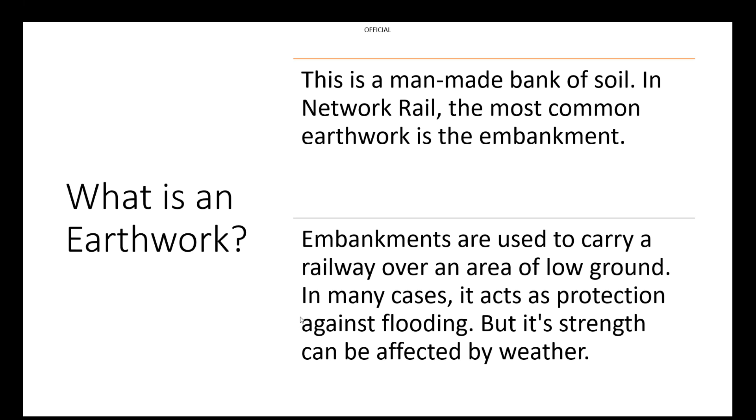So firstly, what is an earthwork? An earthwork is actually just a man-made bank of soil, and in Network Rail the most commonly used earthwork is an embankment, used to support the railway. Outside of the transportation sector, embankments can also be used as flood defences, especially near rivers and towns. But the strength and durability of an embankment can be affected by weather.

Weather can heavily influence the railway, especially one of the most common types of weather in the UK, the rain. This is very evident due to climate change, and is a major issue that the railway needs to adapt to. Rain can affect the strength of the cutting, which can then cause debris to fall onto the track. When debris is on a track, it can lead to severe delays, which damages the reputation of public transport and also the reputation of Network Rail as a whole.

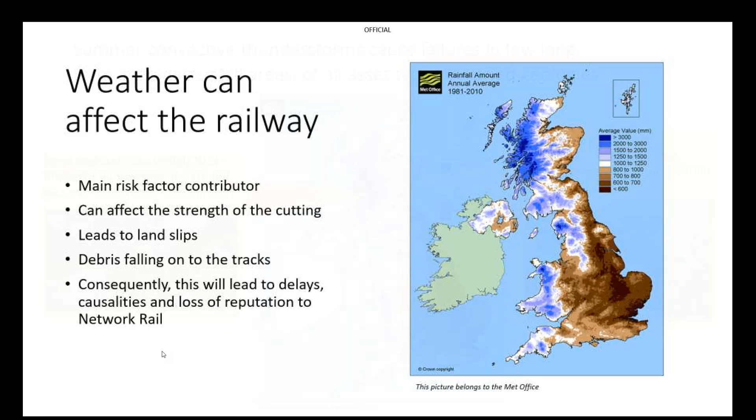As you can see, due to heavy rain, various earthworks have been affected. For example, on the West Highland Line in Scotland, 81 millimeters of rain fell within 4 hours, and this caused an embankment to fail. Then in Stonehaven, a rock cutting failed after 52 millimeters of rain fell in 3 hours.

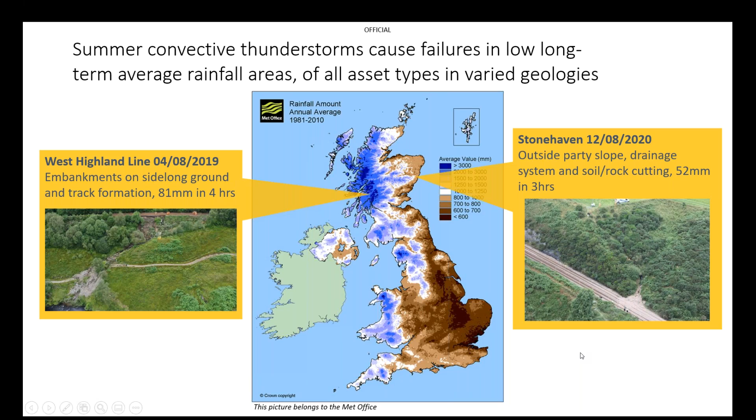Then when we head into England, there was also very heavy rainfall within 1 hour at Whitmore. And when we travel towards Watford, 50 millimeters of rain fell within 4 hours, causing the tunnel portal cutting made out of chalk to fail. This shows us that regardless of the soil type, water is an important issue. The main similarity in all these examples is that they happened in dry areas, meaning rainfall is typically low in those regions. So these failures were very surprising.

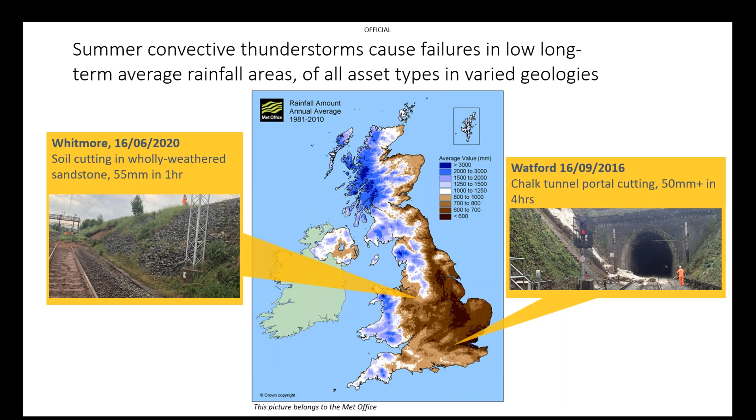So now you're probably thinking, what is Network Rail doing about this? We're learning from our mistakes, as these failures definitely could have been avoided by having a warning system. This has been pushed, and it's now started the development of the Convective Alerting Tool, or CAT for short. It keeps track of the rainfall in the area and sends out a threshold message to the engineers about what could happen, whether a mudslide or debris possibly landing onto the train tracks. By using CAT, Network Rail can further understand the risk levels of an area.

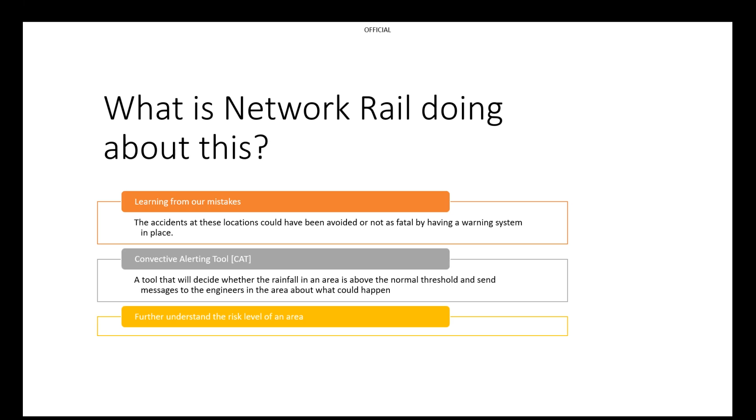So why is the risk level so important? At Network Rail, safety is our main priority. Our main goal is to ensure everybody, including you and me, gets home and gets to work as safely as possible every single day. So by knowing the risk level in a certain area, it helps us achieve that goal quickly and efficiently.

This leads us into the Operational Route Service, also known as the ORS for short. This combines 3 aspects to create an overall risk: rainfall, recorded every 3 hours and 24 hours, asset vulnerability, and network criticality.

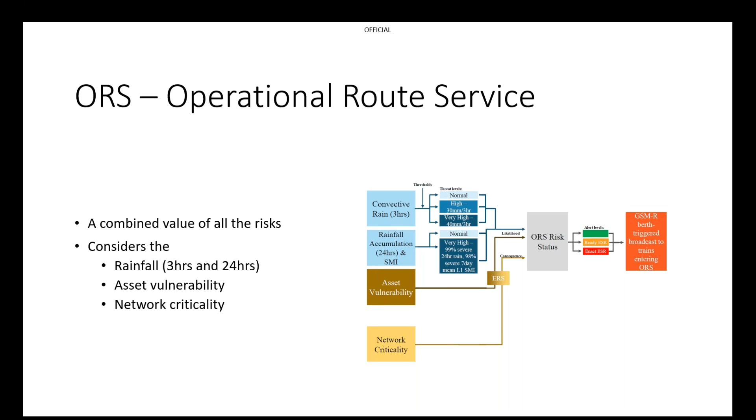To make sure that the ORS risk level is as accurate as possible, we need to make sure that for each of the aspects, they are recorded to a high level.

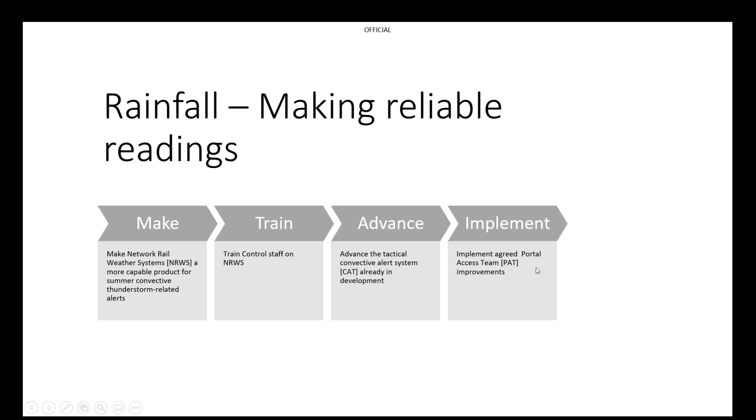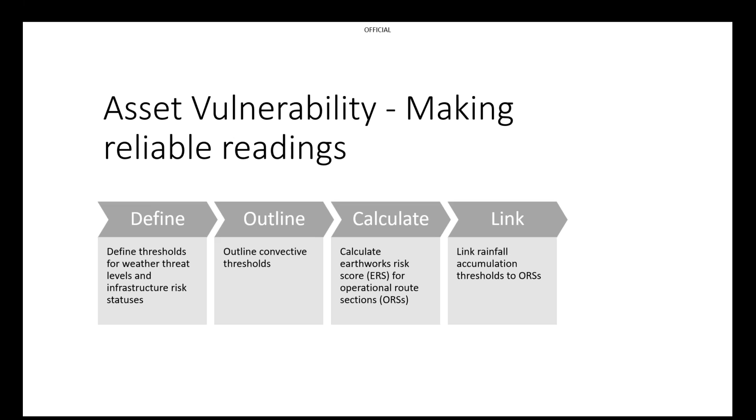Now for asset vulnerability, to make it as accurate as possible, it is all to do with setting boundaries. So this means that we need to define what threat levels are necessary for the weather and also for infrastructure risks. Then when we've defined those thresholds, we outline them, and then we calculate an earthworks risk score for the route sections, and then link that to the said thresholds for an operational route section. Next slide, please.

So now we know how the ORS works. You're probably wondering, what does it do? Well, it identifies which lines have high to low risk ratings. By knowing the risk, resources can be allocated efficiently in those areas to solve the risk, as well as reduce the risk level, therefore changing, say, a high risk zone into a medium or even a low risk zone.

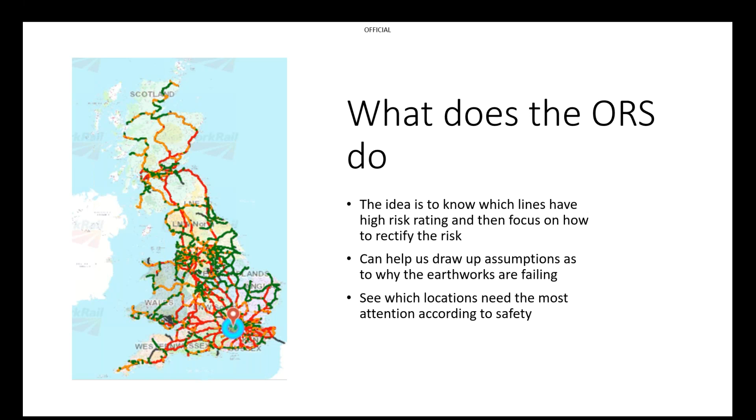So during my business familiarization placement, I joined the final stages of this project, and my task was to create a spreadsheet which highlighted the risk levels of common travel routes. I did this by highlighting various stations and also using the signal locations to find accurate starting and finishing points. The diagram that you see on your screens right now is an example of the data I would have to use.

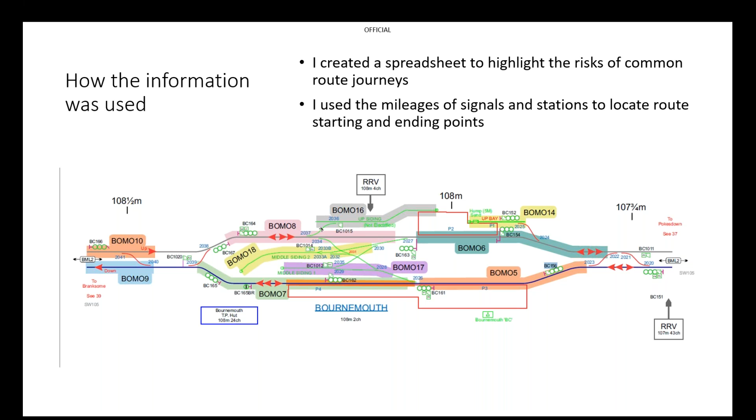So if I was looking at a route that traveled through Bournemouth, I would have to use the Bournemouth measurement, which is 108 miles and 2 chains, and state whether that would be the start point or an end point of certain journeys. Next slide, please.

I then got to use my own judgment to state the risk levels of certain travel routes. This task was done for the Wessex region, the Sussex region, and the Kent region, which happens to be highlighted as the turquoise area on the map of Britain that you can see.

I also got to make a manual to show others how to complete this for all the other regions that Network Rail operates in, as the end goal is to have an ORS spreadsheet for all Network Rail routes and regions. This way it will be easier for track engineers and also civil and building engineers to see where we need to spend most of our resources to make sure that our lines are safe. Next slide, please.

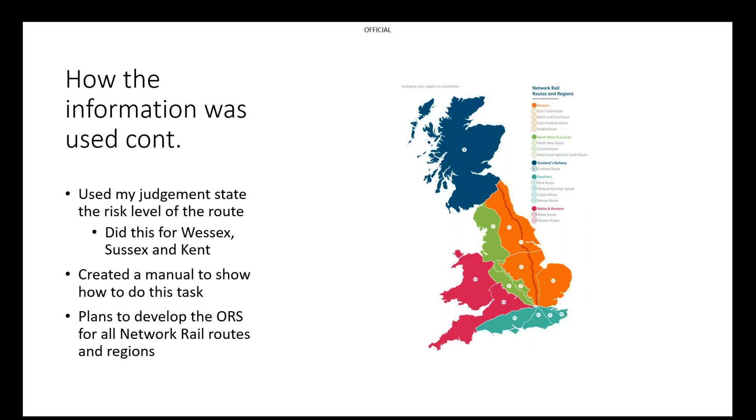So you're probably wondering what are the main benefits to using ORS? Well, there are multiple benefits, and here are a few of them.

We get to locate areas within regions that are prone to failure. We can spend and focus resources in that area to reduce those risks, as well as plan for failures that could happen soon. We can also notify councils about the risk levels of a nearby line, as well as help plan for reduced services and delays, which will be very beneficial as we can tell travellers about which trains might not be running, as that is one of the common issues we face if you ever travel - you go to the train station and find out that your train is cancelled. These notifications can also help with company reputation.

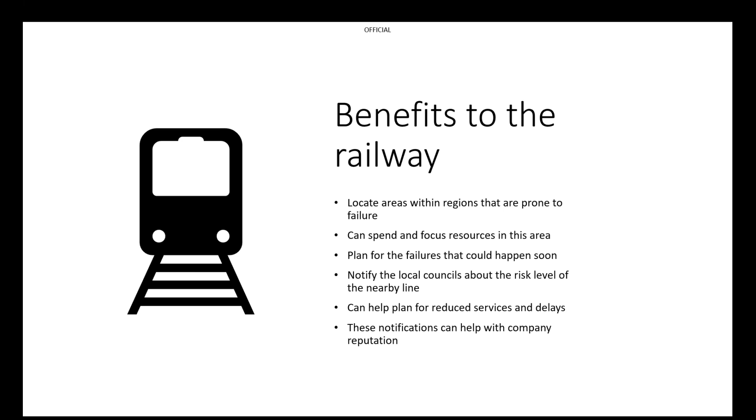Next slide, please. So you're probably wondering what the biggest benefit is. The biggest benefit is that it's giving Network Rail a chance to learn from our mistakes, as well as ensuring us as a company, and others around the world, can learn from our mistakes and make sure they're not replicated again in the future.

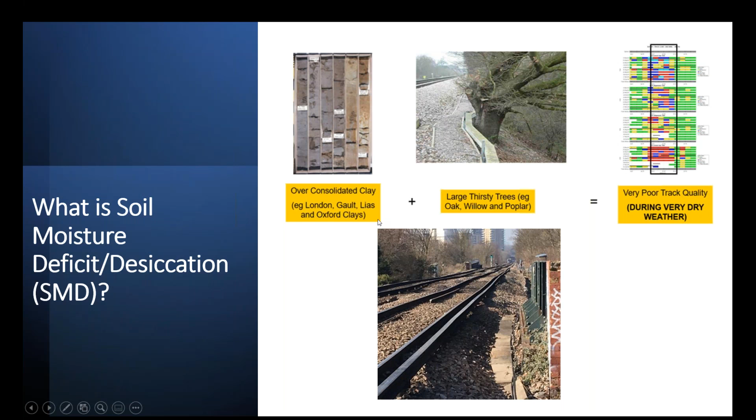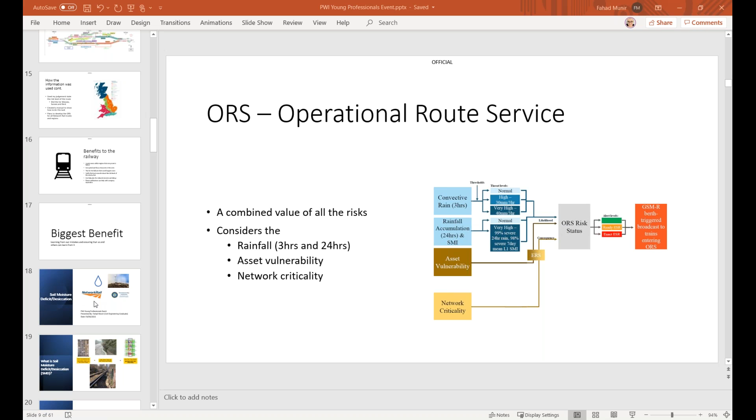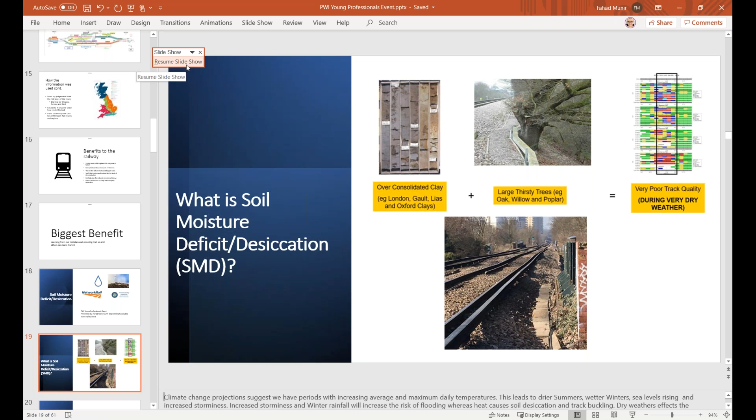Can I just stop right there? Lynn, I can't actually see my notes on my presentation. Sorry, yeah, that's because - are you only on one screen now, or are you on both? I'm on one screen, yes. We might need to try that two-screen format, otherwise you're not going to be able to see them. I'm really sorry, sorry guys, just bear with us a minute. Yes, now I can see my... Yeah, so we're only seeing your slide bank. Can you see your notes on your other screen? No, I'm just putting it up now. Can you see my presentation? Oh, we can - can you just share it? Can you do resume slideshow on that little dropdown, just so we can see the entire slide, or will you not see your notes if that happens? The thing is, I don't know if I'm going to see my notes. I can maybe do that if that's better. Yeah, if that works for you, that's absolutely fine for us. Fahad, no problem, all right. Sorry about that, it just kind of put me off. Didn't mean to catch you out like that, everybody. I'm really sorry about that.

No problem, crack on. So climate change projections suggest that we have periods with increasing average and maximum daily temperatures. This leads to drier summers, wetter winters, sea levels rising, and increased storminess. Increased storminess and winter rainfall will increase the risk of flooding, whereas heat causes soil desiccation and track buckling.

Dry weather affects the settlement of clay embankments. This is caused by shrinkage of clay as the moisture is drawn from the clay. The moisture is further reduced if large thirsty trees are present. This process is where wet soils dry and soil moisture content decreases as moisture evaporates into the surrounding environment, ultimately affecting the ground surface.

The problem we have is the geology in the southeast is a mixture of clay, chalk, and a bit of sandstone dotted around. The locations of clay are very susceptible to moisture change, and when they change, they are also susceptible to volume change. So when clay gets wet, it expands, and when it dries, it shrinks. This is determined by its plasticity.

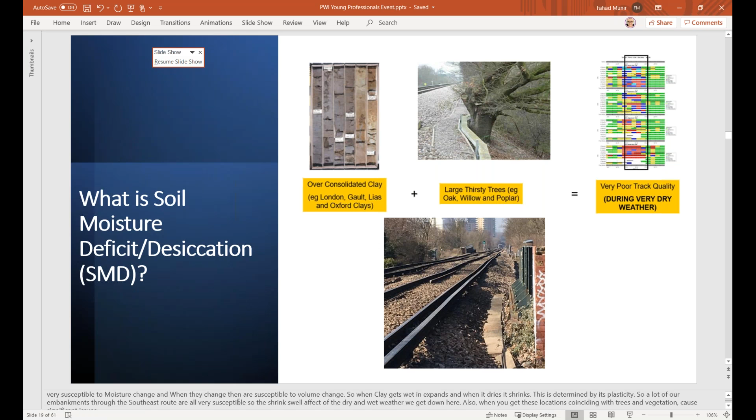So what is soil moisture deficit? Soil moisture deficit is the amount of water needed to saturate the soil and is the measure used to calculate bank settlement status. The most prone to differential settlement are those constructed with London, Gault, Lias and Oxford clays.

The differential settlement results in track geometry deterioration that requires expensive justification work to maintain a safe track and can result in operationally disruptive speed restrictions.

Now, during dry weather, the soil moisture deficit, which is the amount of water needed to saturate the soil, increases. This causes embankments made of clay to settle and results in a sudden deterioration in track geometry. The southern region has approximately 100 miles of these over-consolidated clay embankments.

Now, soil moisture can have significant impacts within the rail sector. The occurrence of earthwork failures has been shown to correspond with ground soil saturation and weather conditions, which have been reported at the time of failure.

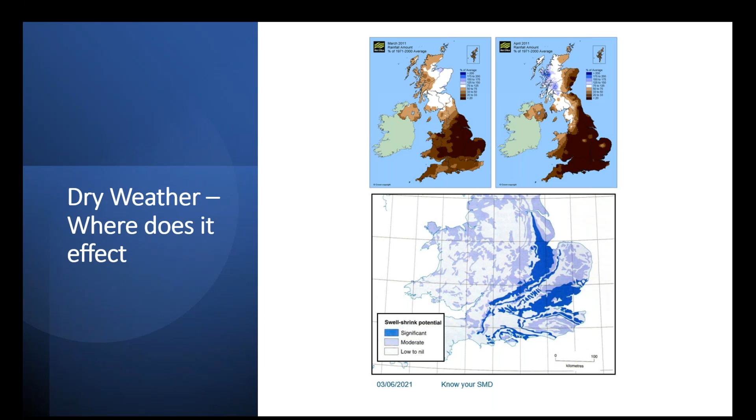Now, the impact it has on earthworks is that the removal of water from the pore spaces in sandy soils does not affect the volume of the soil, but in clays, the removal of water held between the individual mineral components causes the clay to shrink.

The amount of shrinkage is proportional to the percentage of clay particles in a soil, and clays with smaller particle sizes experience greater volume change.

Now, drying effects caused by moisture abstraction by root systems are referred to as tree root desiccation, and the effects can extend to more than 4 meters below ground level and to considerable distances from the trees responsible.

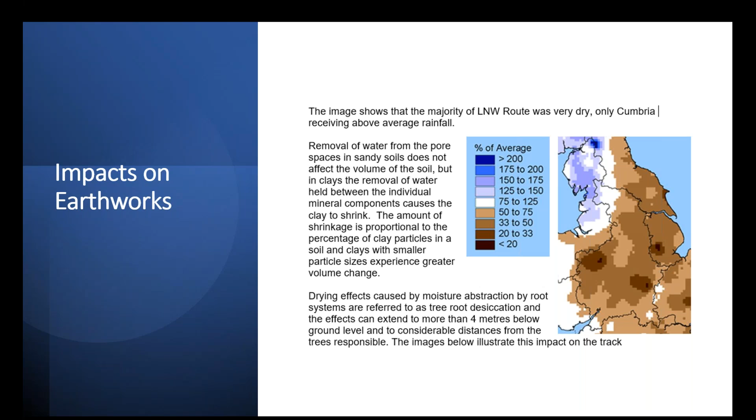The images shown illustrate the impact on the track. Tree desiccation appears to only significantly influence track quality where the railway is at grade or embankment level. The impacts may particularly be emphasized at the interface between hard structures, such as under bridges, and earthworks.

The impacts show themselves as settlement of the track formation, leading to isolated loss of track alignment. These defects commonly lead to bump reports and, in extreme cases, may require the imposition of speed restrictions to manage safety risks associated with track faults.

Once the impact of desiccation shrinkage starts to show, the evidence is that movement continues for weeks, even after the trees responsible have been removed. Because of this lag time, early identification of susceptible locations and advanced planning of interventions are essential.

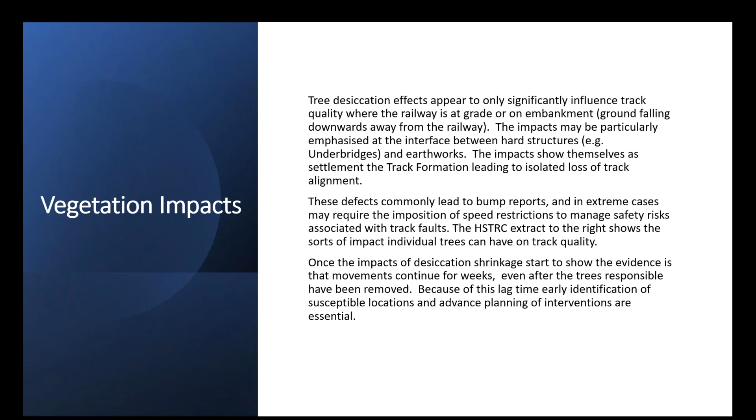Now, the severity of SMD varies each year, but it is predicted that the very dry SMD peaks will become more frequent and longer. Previous experience has shown that track quality is adversely affected once the SMD rises above 175 millimeters. In the past 12 years, this has occurred in 10 years.

Here is a diagram showing the average SMD by month for the last 12 years. It also shows the amount of TSRs that were instigated as a result.

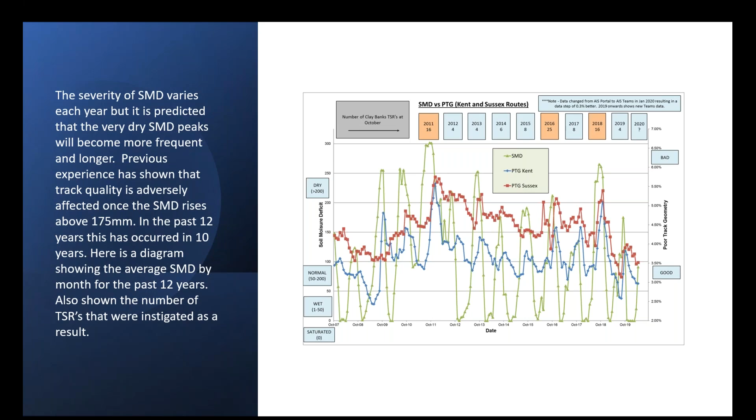Now, as you can see from this graph, anything greater than 200 we would consider as high SMD, basically dry, and anything between 50 to 200 we consider as normal, and anything between 1 to 50 we consider as wet.

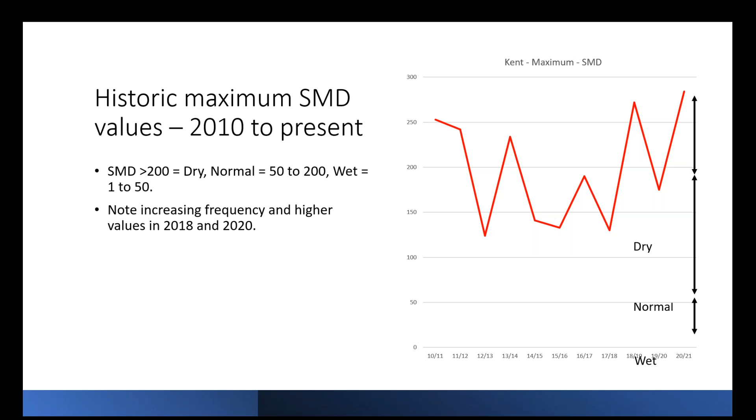Now, as you can see, in 2018 and 2020 the SMD levels were very high. We are still trying to figure out the reasoning behind that, as it's more recent than before. It's been the highest it has been so far, but that is basically caused by the weather.

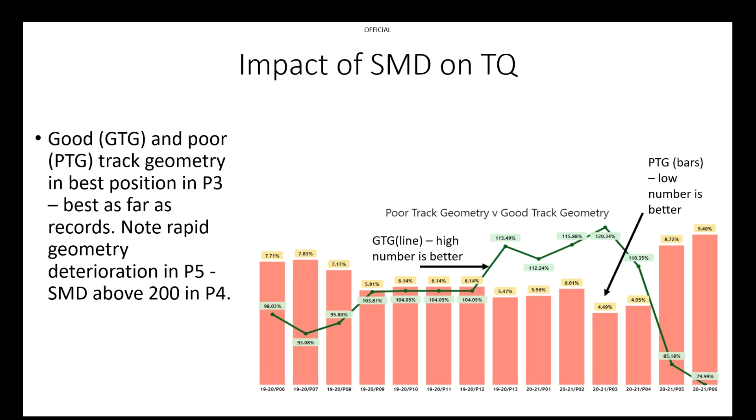We manage soil moisture deficit sites using the prioritization tool described, based on knowledge of locations where poor track quality is identified during hot weather. Delivery unit maintenance teams should be able to more accurately establish a mitigation plan. The plan is split into two sections: prior to the onset of higher SMD, mid-November to May, the preparatory process and activities to ensure track and earthworks assets are in as robust a condition as possible.

The second part of the mitigation plan is the high SMD season, between June and November—one can call that summertime. This covers the process and activities for locations requiring recovery work, mainly needed in summer. So our main management process is to make sure all mitigation plans are in play before summer occurs.

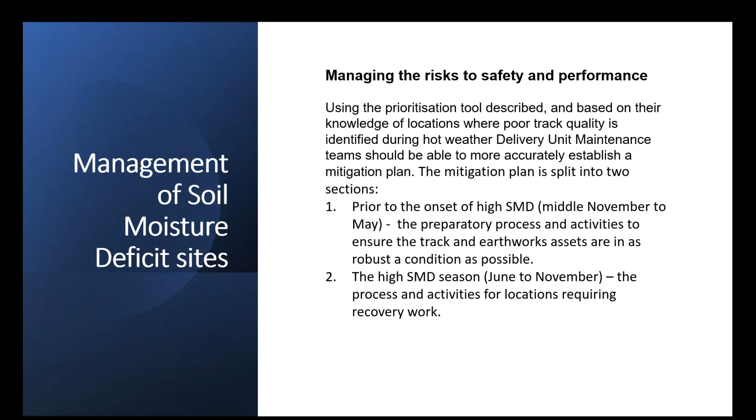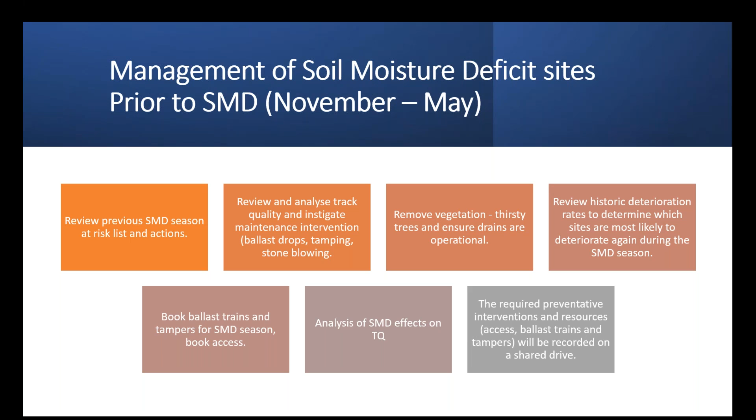The management of soil moisture deficit from November to May involves reviewing the previous SMD season's at-risk list and actions. We review and analyze track quality and instigate maintenance intervention, remove vegetation, and review historic deterioration rates to determine which sites are most likely to deteriorate again during the SMD season. We book ballast trains and tampers for the SMD season and analyze SMD effects on track quality. Required preventative intervention and resources are recorded on a shared drive.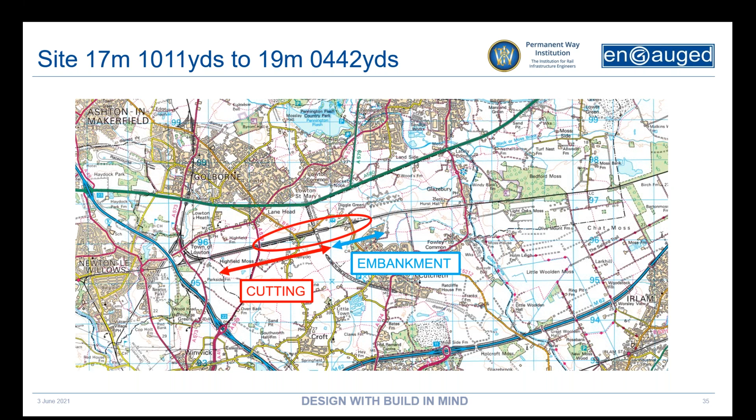As you can see by the red circle, about 60% of the site is in a cutting—a significant cutting about 6 meters tall with significant slopes—with the tail end of the site on an embankment. The outfall to the site for the downside is right at the tail end of that embankment. Next slide please.

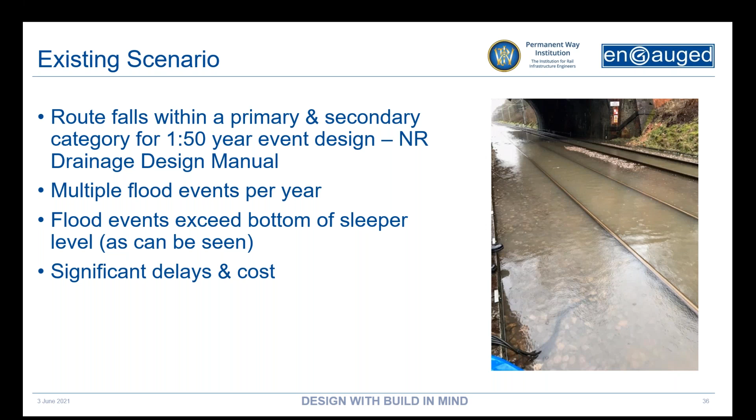The crux of the problem is right there in the picture—there's a significant flood issue on the site. This line falls within a primary or secondary category, meaning the track drainage has to cope with a 1 in 50 year design event as defined by the NR Drainage Design Manual. The site experiences multiple flood events a year reaching the bottom of a sleeper, with a couple of events hitting the top of the rail. The main problem is this incurs significant delays and costs, and presents a risk to the track infrastructure.

Next slide please. Believe it or not, track infrastructure is not a naturally occurring item—these were nice flat plains before the track came along. So one of the first things we look at during the desktop analysis is what the existing flow patterns were on the soil and ground around it, where the outfalls were, and what incoming flows and runoffs were prior to the track essentially installing a large gutter right through the area.

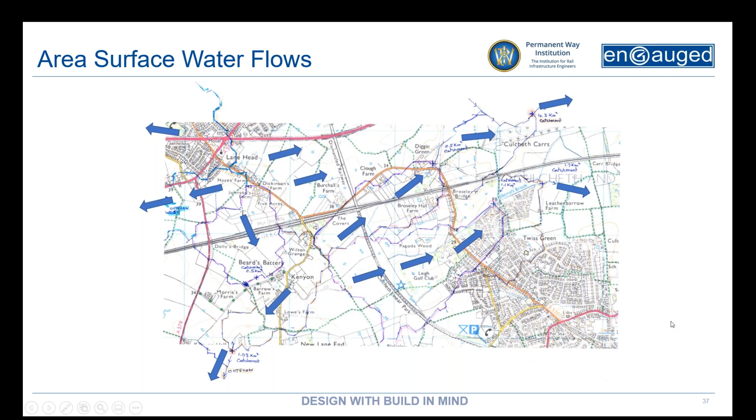Next slide please. As part of this, we identified up to 7 significant flows coming into the track between a junction and the outfall. You'll see on the next slide that flows 1 and 2 were discounted due to being outside the remit site, as well as being dealt with by other track drainage. Flow 3 was defined as surface runoff from a field to the north.

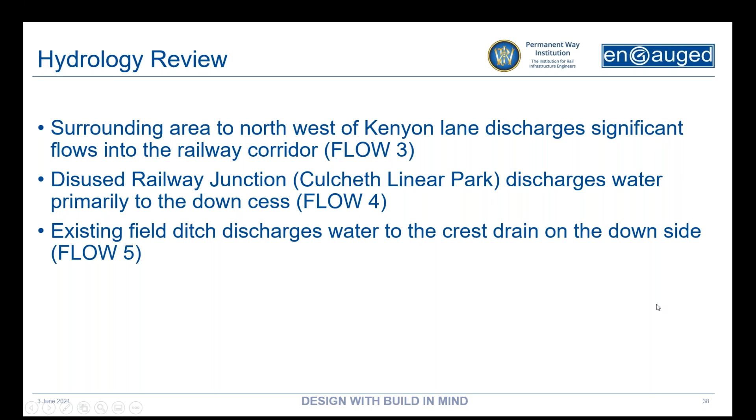Flow 4 was a disused railway junction, which still had a slight dip in it, gathering water and discharging through redundant track drainage into this site. Flow 5 itself was defined as a ditch coming into the site from field runoff. That was dealt with by siphons, and it was believed that the siphons weren't functioning correctly.

I'll just give Fahad a chance to catch up. There we go, yep.

So flow 3, as we can see there, is between what's called Dolly's Bridge and Kenyon Tunnel. That was a significant flow gathered up by surface water runoff and sent into the track drainage through pipes off-site. Number 4 is the track drainage. Number 5 is defined as the ditch, which was supposed to bypass the track infrastructure through a siphon. 6 and 7 weren't defined as quite significant, so they were combined into flow 5 as part of the drainage modelling I undertook.

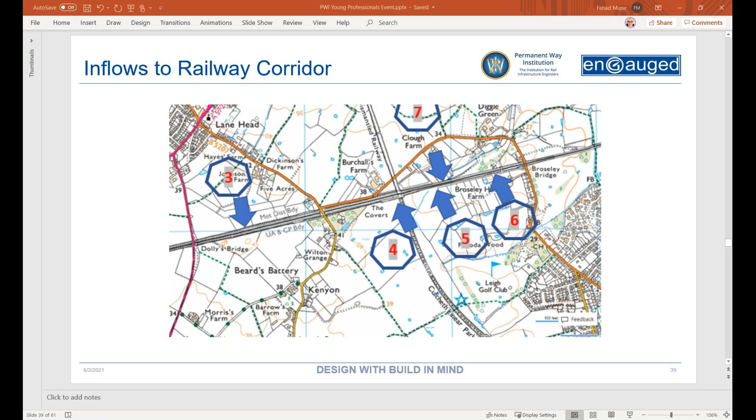Part of the information gathering prior to the hydraulic modelling was any desktop information we could find, such as analysing LiDAR data, finding where the flow runoff patterns are, any existing ground information we can find, and any existing Network Rail provided information on the site itself.

Part of the information gathering was a topographical survey through the site itself. Quite an extensive site, it covers about 3 kilometres, with the upside drainage outfalling about 2 kilometres down the track, and the downside drainage running straight through to the outfall, which was a culvert that goes under the track and then off to the north.

Ground investigation was undertaken through trial pits around structures and through boreholes themselves. It found there was quite a shallow bed of sandstone, which can become quite a design risk and constraint with regards to excavations.

Part of the information gathering itself was catch pit inspections, and manhole cards were produced. This looked at the condition of the catch pits and any visual siltation evident. The downside and upside drainage throughout the entire site, for the most part, was heavily silted. That lends a massive restriction on performance of the drainage.

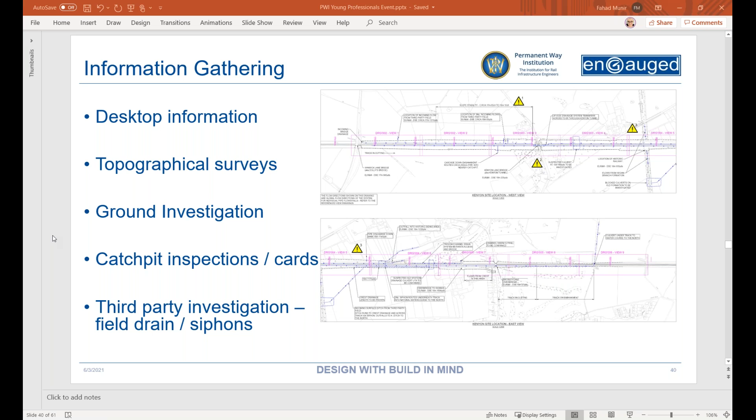So throughout this work we undertook hydraulic modelling. The inflows were calculated and produced through two ways. One was EA provided LiDAR data. What this does is you import LiDAR data into the model. This produces a mesh, which then takes the rainfall you apply to it and routes it into nearby drainage systems as it would work in real life.

Incoming third-party flows, such as the field runoff, plus the siphons, plus third-party redundant track, were produced as inflows, more or less point flows produced within the manholes and then flowing into the system themselves. As you can see at the bottom, there's a snippet out of the model, which shows surface flooding throughout the site. Because we experienced surface flooding on site, we correlated the hydraulic model we produced with what was experienced on site, and we validated the model through that. Because the results correlated to what we saw in reality, that validated the model.

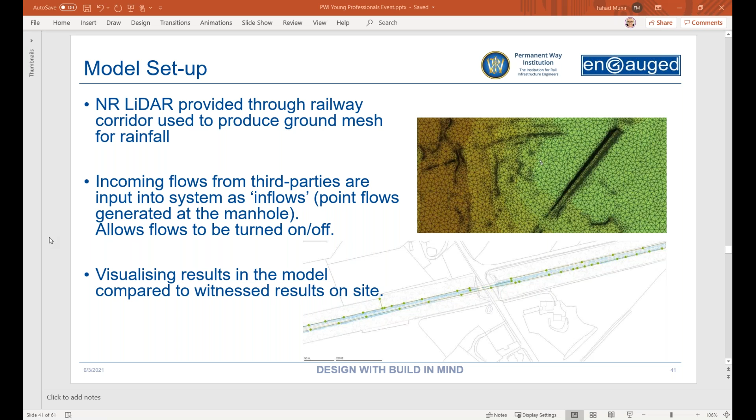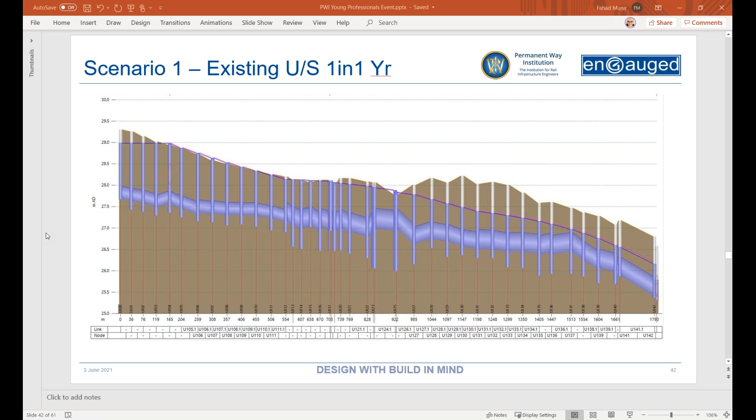The way the hydraulic modelling was undertaken, the rainfall itself was present in all the scenarios. The track drainage itself is designed to take the rainfall, and there's nothing you can feasibly do about that, so that was present in everything.

The incoming inflow 3 was present for some simulations to test its sensitivity on how much impact that has, as was inflow 5 and inflow 4. They were toggled on and off to see how impactful they were on the results.

Inflow 4 and 5 were assumed diverted. These are supposed to be dealt with by siphons, so the idea was that if the siphons were fixed, those would be diverted and the flows would be removed. Inflow 3, however, there was no feasible way to divert this flow, so attenuation for inflow 3 was modelled.

Each of these scenarios, about 7 or 8 total, 8 scenarios total, was run at a 1 in 1 year rainfall and inflow event. If it passed, it was run over and over again for a 1 in 2, 1 in 5, 1 in 10, 20 and 50 until a failure is met.

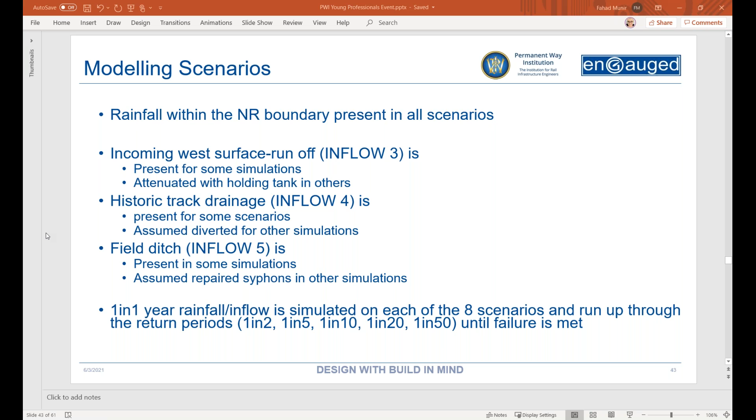That is a breakdown of the scenarios. 1 to 7 is a combination of the existing inflow combinations with a track drainage relay, in either 450 or 600 pipes. Number 8 itself was if you did not deal with any external flows and the track drainage was to cope with all external flows, what drainage, pipe size and grade was required to deal with that.

If you could deal with everything external with an internal solution, what would that involve? Next slide, please.

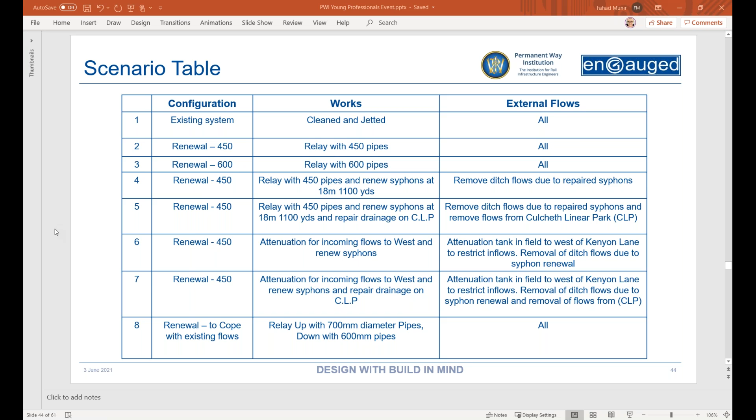So to deal with everything internal, to deal with all external flows with just a track drainage renewal, that would require a 750 mil pipe on the upside and a 600 mil diameter pipe on the downside, and that would pass a 1 in 50 year event. However, 750 and 600 mil diameter pipes are significant.

With the other scenarios themselves, we saw little to no benefit without considering or managing external flows. The most significant flow we found during the modelling was in inflow 3, the surface runoff from a nearby field, which was modelled and controlled by attenuation. That yielded a result at 1 in 10 year, which is significantly lower than the 1 in 50 year requirement for the Network Rail Design Manual.

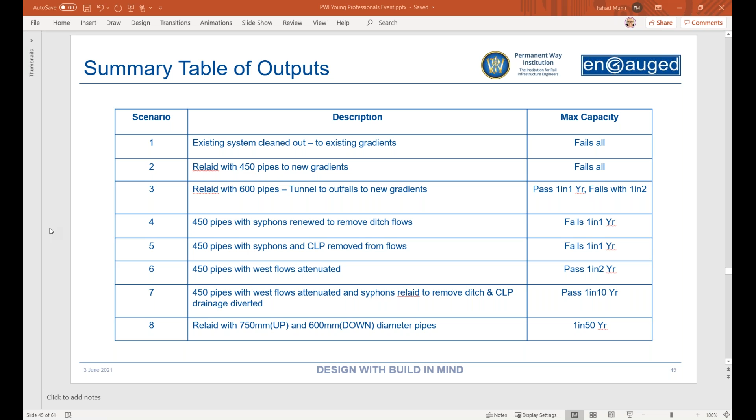Next slide, please. So there is a view of the extract of the hydraulic modelling.

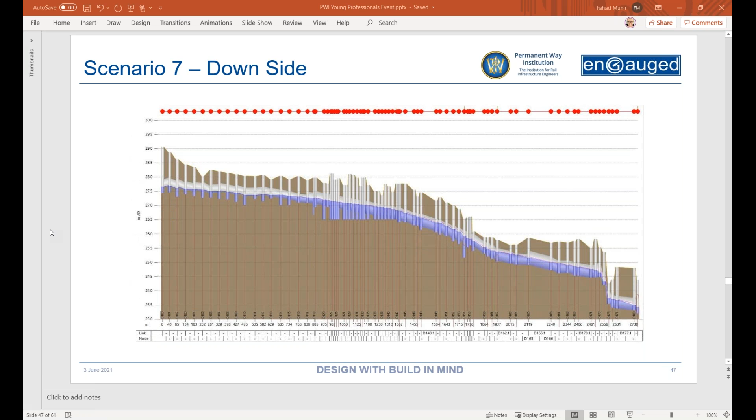And likewise, there's the downside. The tail end of the site itself, that dip there, the drainage does run down the embankment. Next slide, please.

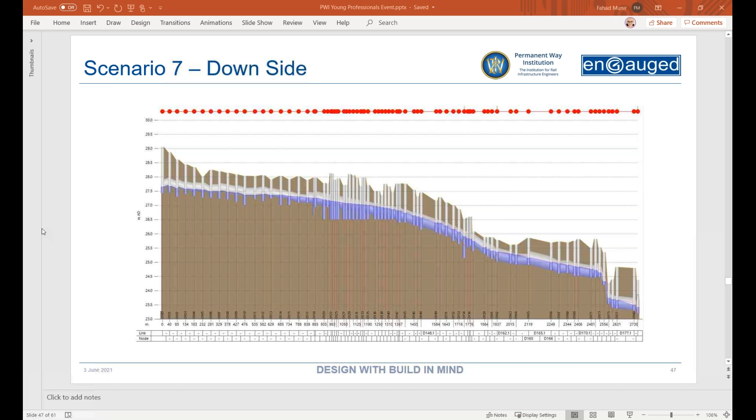So the conclusions were: most scenarios, unless you deal with external third-party inflows, fail a 1 in 1 year event with no significant benefit.

To retain all the incoming flows and provide for a 1 in 50 year event to achieve the Network Rail Design Manual standard, significant pipe installations are required, such as a 750 mil diameter on the upside, 600 mil diameter on the downside. On the upside, this presents significant constraints due to there being a bridge to get through, bridge abutments to avoid. There is OLE on site, cabinets, electrical installations on site. So the most feasible option was to propose a solution that controlled third-party flows coming into the site through attenuation.

This is proposed to have multiple benefits. The site itself holds an adverse weather status due to embankment slip. The drainage solution could have benefits to the earthworks due to bypassing or intercepting surface runoff, which is affecting earthwork stability.

So currently, the proposal is to stage the works, deal with the track drainage, and then look at third-party solutions as well. I think that is about it for that. So I'd like to hand over to Heather for the next part.

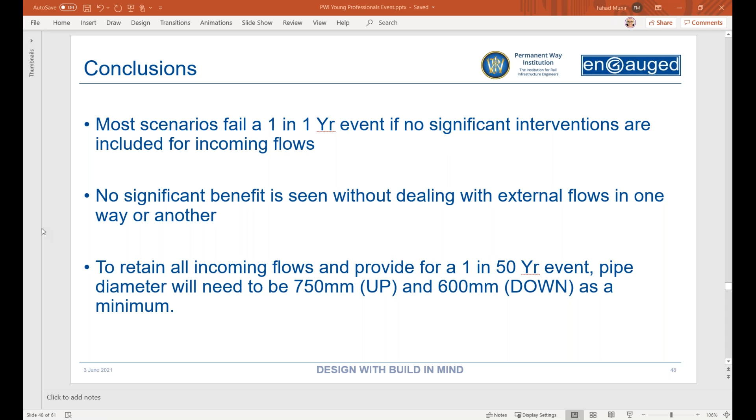Good afternoon, everybody. My name is Heather Campbell, and I'm Assistant Project Engineer for Systems Engineering for Network Rail. I'm going to give you a little bit of an introduction to systems at Network Rail.

Next slide, please. So I thought we'd start by just looking at what a system actually is. A system is a combination of assets, equipment, people, procedures, software and data designed to work together for a common purpose. One of the biggest systems that I know of is the railway, a system made up of many different parts.

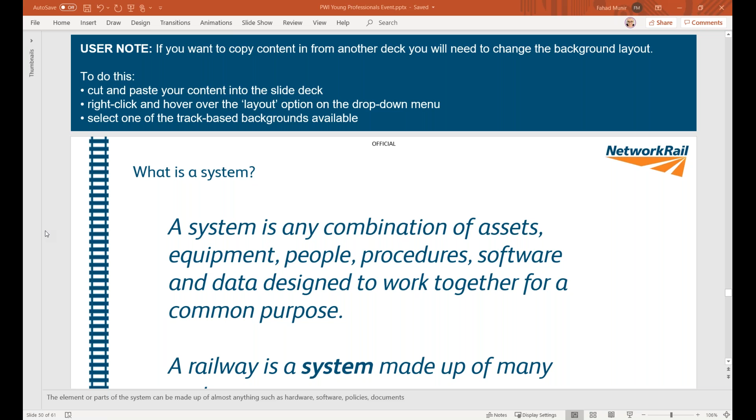So if you could just move on to the next slide.

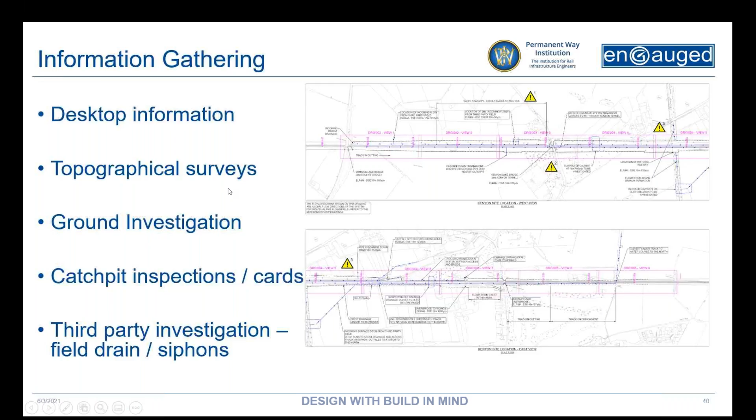Thank you. Oh, next one.

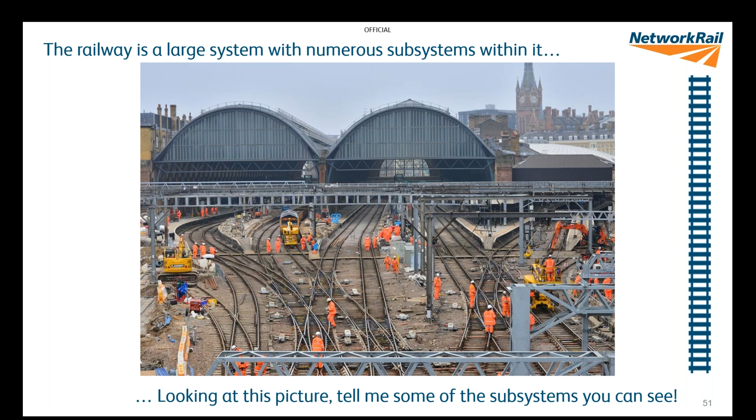So, as we've seen in the chat, there's lots of subsystems within the railway. And within that, if we take the signalling system for example, that's a huge system. And within that you've then got numerous subsystems again within signalling. So one example of that would be the power. We need power to power many things within the railway, and specifically the signalling. So we have to have a system for how that then connects with the national grid and all the power that comes from there as well. So there are multiple subsystems within subsystems, so it can become very complicated when we're looking at projects and maintenance. Just go on to the next slide, please.

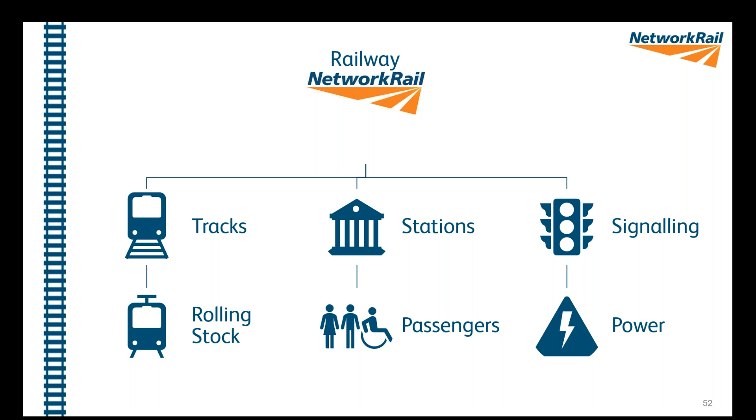So once we've thought about all the different subsystems within the railway, we then have to think about all the interfaces. So when we're thinking about a project, or about maintenance, we think about how this interfaces with the rest of the world, really. So when we think about Network Rail, we can then think about all the different interfaces outside of the company. One of the biggest ones is our roads and highways. We interface with this in many different ways, it may be bridges, it may be the passengers in their cars or passengers on our network, emergency services. We've also got our line side neighbours, our train operating companies and freight operators, and even government policies and funding. They're all things making an impact on how we run the railway as a system and how we have to respond when we're undertaking work.

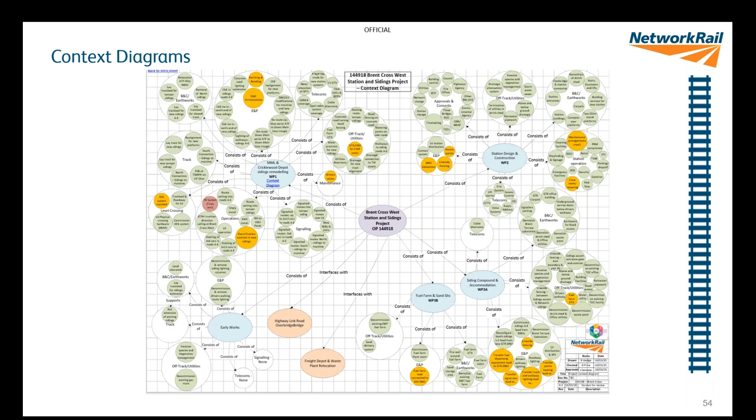So what do we do once we've done those context diagrams? Well, we look at requirements, which is probably something you're more familiar with. When we create requirements, it's really important to think about that context diagram, as all the individual components we've added in there have their own different requirements. For example, the fire escapes - there may be policies and standards to adhere to, diversity and inclusion, environment is something every company is now bringing to the front, and that affects every different element. So writing requirements for what the project requires helps make sure you cover every element of the project and each interface involved.

So how do we document this process? Next slide, please.

At Network Rail, we have a requirements framework. This is how it currently stands - it's just about to be updated, but this is how it currently works. We're hoping to make it a little simpler, but currently we have three different requirements documentations. You start with a client requirement document, a CRD, which is a very high level document and often is your remit - it may say increase capacity by this much or this percentage, or electrify this line to this line. So it can be very high level and could lead to lots of different answers depending on how you interpret the document. We then move on to what's called an RRD, a route requirement document, which is project level, looking at maintenance, what the route requires. It's a medium level, not very detailed document.

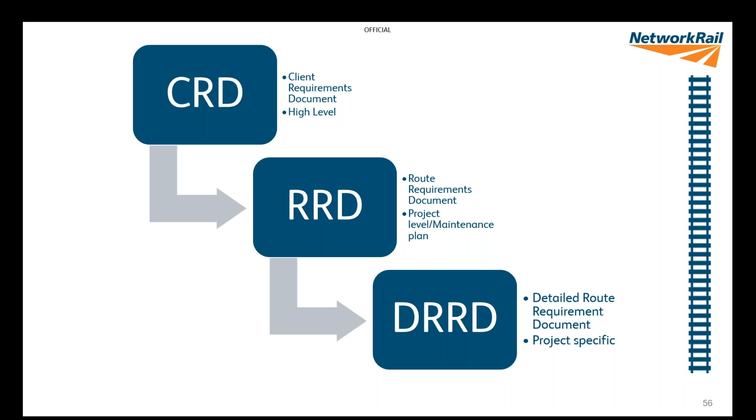So how in systems engineering do we ensure that we actually - we write all these requirements, produce the documents, and then they get filed away. What do we actually then do with them? As systems engineers, we undertake something called a verification and validation process. It's something that should go on throughout a project, but is often left right till the end and then becomes something that needs to get completed quickly. So we start with verification.

The point of this is to look at design - so your grip stages 3 and 4, your option selection and detailed design. We're looking at whether the design meets the requirements we've set out. If you're going through this at the actual time, you can highlight issues - we haven't hit this requirement, we need to amend the design - which is much cheaper than trying to amend it further down the line. We then undertake a validation process during your further grip stages, construction and implementation.

This ensures that what is constructed actually also meets the requirements - what we've asked to be done has actually been done, which on simple tasks seems really basic, but on giant projects, some of the smaller detail can definitely get lost. For example, we asked for this colour wall to be painted this colour, but actually you painted it the wrong colour - sometimes it might not matter, but it might be because we chose it to fit in with something else. So it's really important these are hit correctly. We ensure this is done through a variety of ways - review, inspection, surveys, testing, demonstrations, or analysis afterwards.

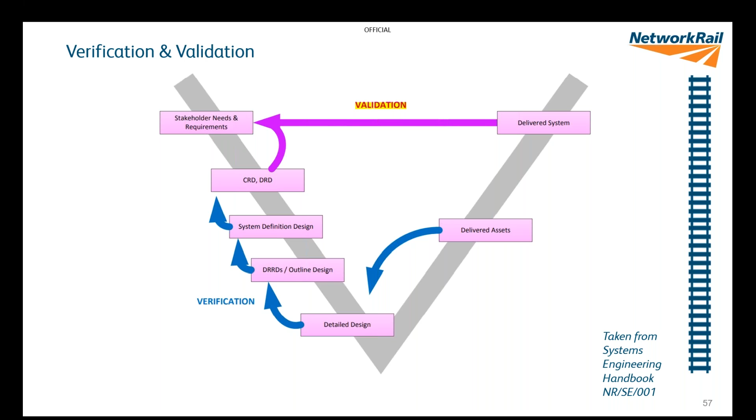At Network Rail, to introduce systems engineering and get it moving, they put together a framework called Systems Integration for Delivery, SI4D, highlighting 7 key themes important to Network Rail that we feel we need to improve on. These themes include things like validation verification, context diagrams, and other processes brought in that we're trying to integrate into project work to help save money and ensure we are doing what we actually want at the end.

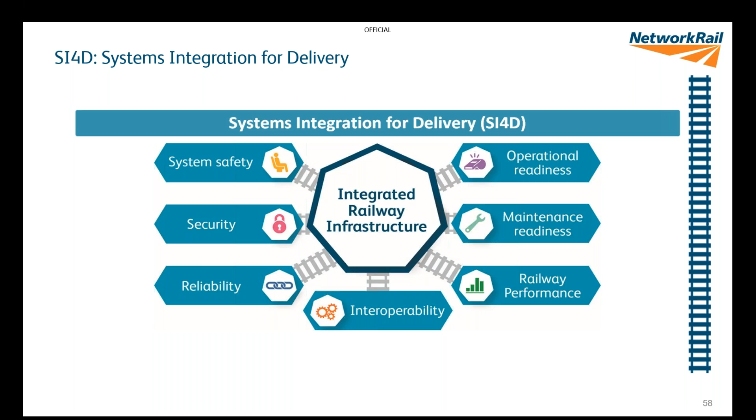So what is the benefit of systems integration? There are lots of different benefits, but the key one is that we actually get it right the first time and every time, so when we've completed the project, we've completed what we set out to do. Going through the processes with systems integration helps clarify what's required from each of the teams, helps people be more effective in their role, makes it easier to confer with our suppliers throughout the process, and hopefully means improved infrastructure performance and service for our passengers and freight customers.

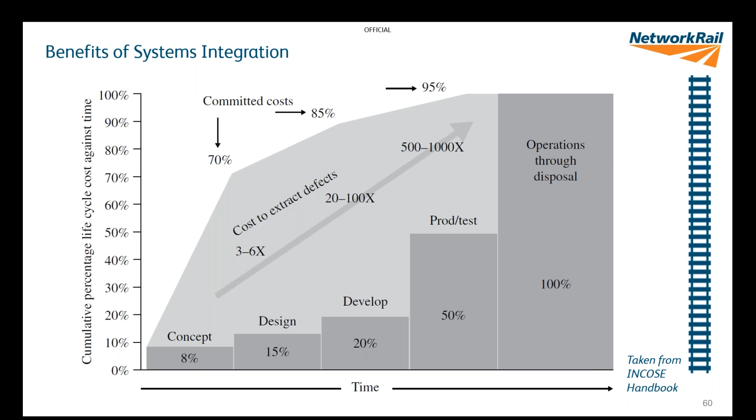Thank you for listening, and I'll be happy to take any questions in the chat.

Thank you, Heather, and thank you all. Yeah, guys, if anybody's got any questions, feel free to ask them of the group or post them in the chat function, and I can answer them on your behalf. Dave's thrown a few in. Right, first one to Lilian.

What is the data input into ORS?

I think the data input is to do with the rainfall data from the Met Office, and also the risk calculations are based off a matrix which is just the consequence times by the likelihood. I think that answers your question. I'm sorry if it's not as detailed as you would like.

Thank you, Fahad, I'm sorry. Just saying thank you.

Fahad, there's one for you as well, and my question probably forms part of it. Dave asks, do we need to chop all the trees down to mitigate soil moisture deficit? At the start, I wanted to ask Lilian a question, but it's merged into yours. What I'm very conscious of is we have a massive vegetation problem on the network. We often manage it in a way I'd call a scorched earth policy, where we literally take everything away, and that introduces earthwork problems or the potential for them. So my thought was, what is the balance?